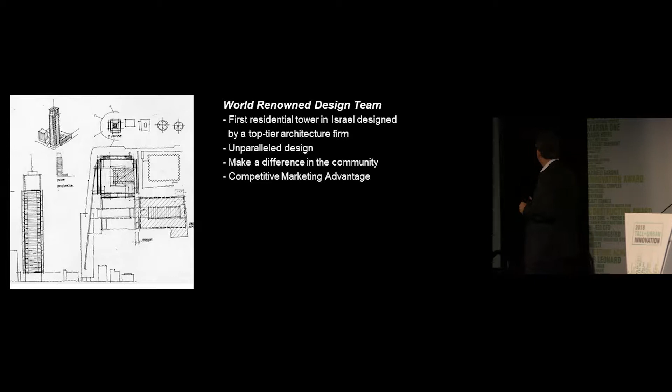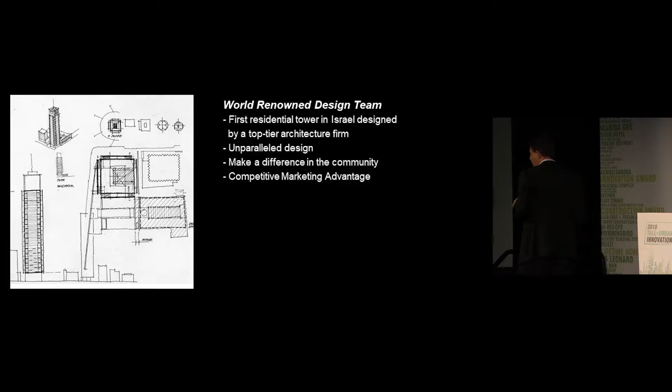As I said, we decided to go with Richard Meier and Partners. We went there, saw their approach to things, and we really liked it. We decided that unparalleled design is the only way for us to make a difference. We need to do something that people will understand is it - that there is nothing better they can choose - because those who are willing to pay $3,000 a foot have all the alternatives. They know what's really good, and we need to cater something which is going to be the best in Israel to date.

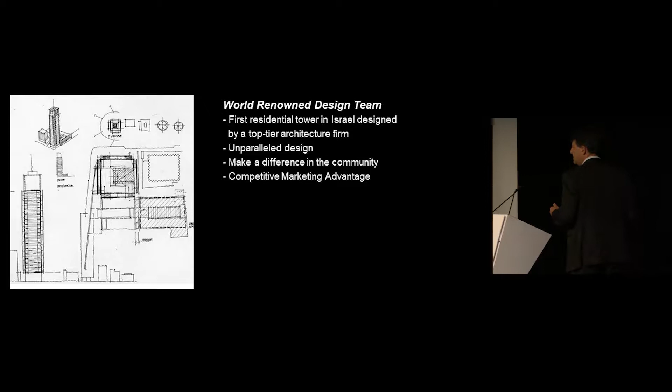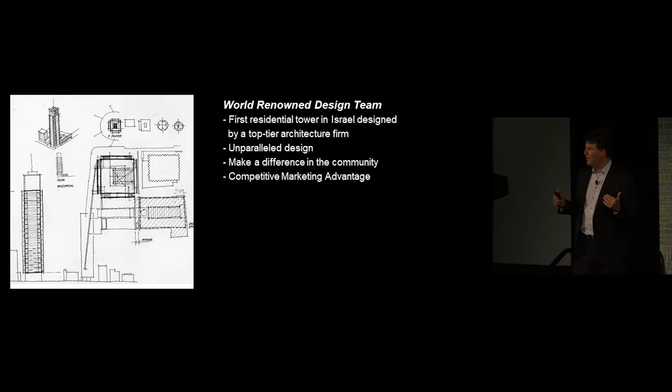Another factor: we were thinking that doing something beautiful on Rothschild Boulevard will give back to the community. Israel is a young country, 70 years old. Tel Aviv is a young city with no real architectural legacy. We thought we needed to raise the bar. We needed to do something better in order for people to appreciate the tower, and hopefully for our tower to become a benchmark.

Something funny - municipality, all the developers, everything goes to the municipality. We were asking to increase the FAR, the amount of meters we could build. On our first meeting at the city engineer's place, when we came with Richard Meier and Partners, it was very funny - the city engineer himself ordered cappuccino for everyone, which may sound like nothing, but for Israel, believe me, it is crazy. Never would the city engineer order cappuccino as a symbol. So when Richard Meier and Partners came over and we got the cappuccino, which seemed something simple - it wasn't.

We got a real tailwind from the people in the municipality. They actually loved us. They were able to fall in love with the tower, to fall in love with the vision, to fall in love with our idea of let's raise the bar, let's do something better, let's do something that was never done before. We were young, we were bold, we were energetic, and luckily the municipality came with us, and we were able to get another 10 floors, which from the developer standpoint is a major difference from a profitability standpoint.

Another thing we're proud of: the buildings around us today - after the fact that our building was finished like 3 years ago, many other towers took ideas from us, or as we like to say, they were inspired by us. Other towers are taking some of the ideas we had and implementing them in their towers. So for us, it's very, very - we're very happy to see that people are taking inspiration from our tower and implementing it in their towers.

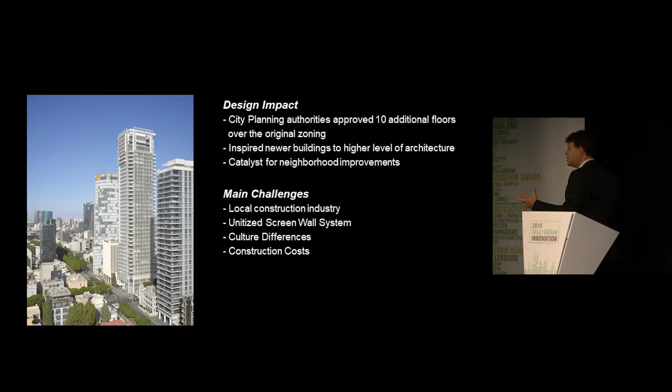From the neighborhood standpoint, we were on the corner of Rothschild Boulevard, which is great, and also Allenby Street, which wasn't that great—it was very much like Canal Street. But after we built the tower and everybody saw that it's something magnificent, even Allenby Street became a better street. The area near the tower became better, the land was more expensive, developers were able to invest more in their development, and around the tower and Allenby, small but beautiful buildings are being built. So in a way, the tower changed how the architecture, business, and development is made.

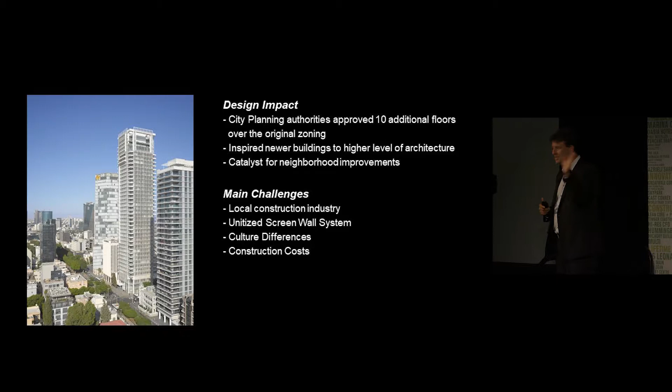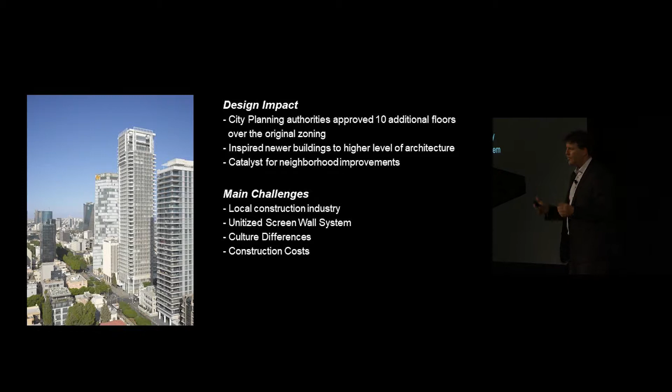As for challenges, it was very funny—we were a young country doing the construction. We had the royal team from New York flying over, speaking English, having these blueprints, etc. And we were sitting with very hardcore people who never speak English, never saw international firms, never saw that—they're just hardcore people who are building. We needed to bridge the gap between the vision, the detail, and the specifications, and people who are ready to work on simple things, on hard concrete, doing stuff which is totally different. So we had to spend a lot of time bridging the gap.

Another culture difference: when we went to the municipality in Israel, we have great weather, great food, but we have war every like 5 years. So unfortunately, we need to have a bomb shelter on every apartment, made of concrete. It was a huge challenge to explain to Richard Meier and Partners how we need to build a bomb shelter on every apartment—that was a crazy culture difference. But luckily, they did it magnificently. They put the core, attached the bomb shelter to the core, and kept the beautiful facade.

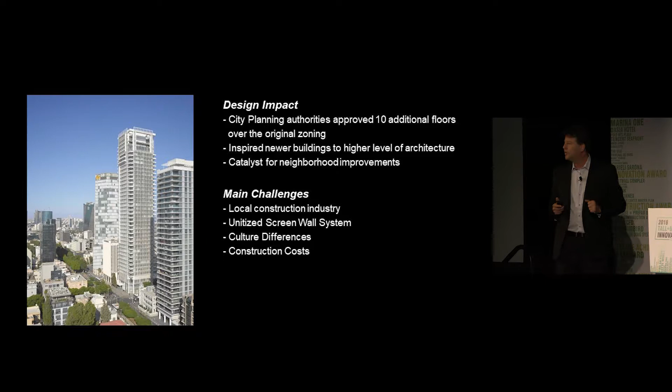The last thing—when we started as a young company doing something very bold and courageous, it was like a recipe for disaster. But working hard with great partners, like our great CM, Vaxon Govrin and Israel David, we had a great team, and with Richard Meier and Partners, we were able to build something that eventually proved extremely profitable for us. Our tenants doubled the value of their apartments, and the whole neighborhood and city gained a beautiful tower that today is becoming a benchmark for future towers.

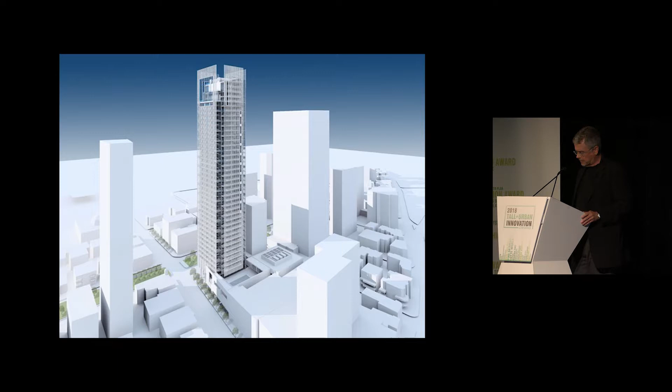The third issue was on the environmental side: to develop a sustainable approach to this arid desert climate, which had tended to generate, around the time we began this project, a crop of fairly anonymous solid or reflective glass buildings. This building is a simple, graceful 42-story residential tower resting lightly on a retail base. It has connectivity to its own retail arcade, restored in a through-block connection from Allenby to Yavne behind the building. That retail assembly has helped embed the building and its residents in the pulse of the neighborhood. The building was also designed with Bauhaus principles in mind.

Our goal for such a large building in a sensitive setting was to tread as lightly as possible. For us, that meant a building of lightness and transparency in order to reduce its scale and mass. That was important for three reasons: in the context of the low-rise neighborhood, to distinguish it from the relatively scaleless reflective towers in the vicinity at the time, and also importantly, to express the optimism, openness, and energy of modern Tel Aviv.

The mechanism for that was a clear glass facade, protected from the desert sun by a delicate louver screen. The screen is an elegant white veil inspired by several things: the vented protective layers of Middle Eastern clothing, traditional Middle Eastern clothing, and local architectural precedents in the ubiquitous trisim, which are these louver blinds.

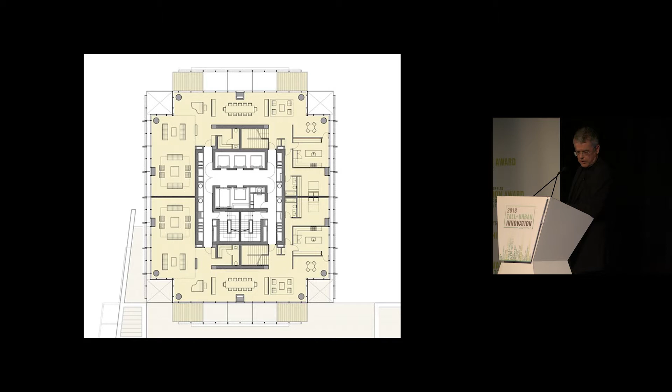This plan's modularity and its small floor plate also create a tremendous amount of flexibility. There's a simple diversity of apartment sizes where one can take a quarter floor, a half a floor, or a full floor. You get the feel of the screen and the balcony. There's a terrific quality of diffuse light in the plan and a simple, very, very simple material palette. No surprises there.

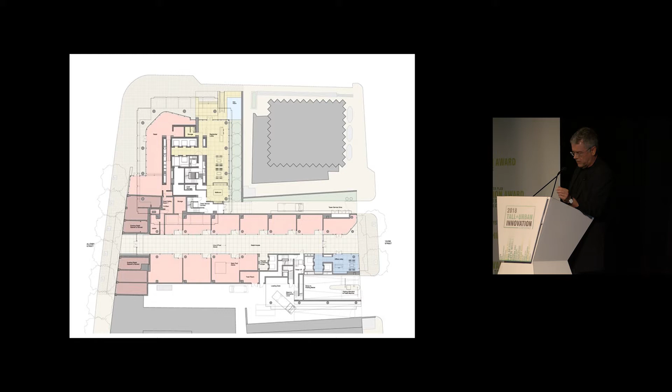The ground floor has lobby and retail spaces that are spare and lofty and open. There is a garden amenity to the lobby that helps soften the compression between this building and the neighboring bank building. And there's a large food court arcade underneath, these amenities which are behind the building, on top of it, a pool, a spa, and lounges.

In terms of contributions, I like to think that we've designed the building to recognize its role in the city. There are gestures at different scales to the base and the shaft and the top. At the street level, the building is lifted on piloti with an undulating glass wall that moves in deference to the importance of this street corner.

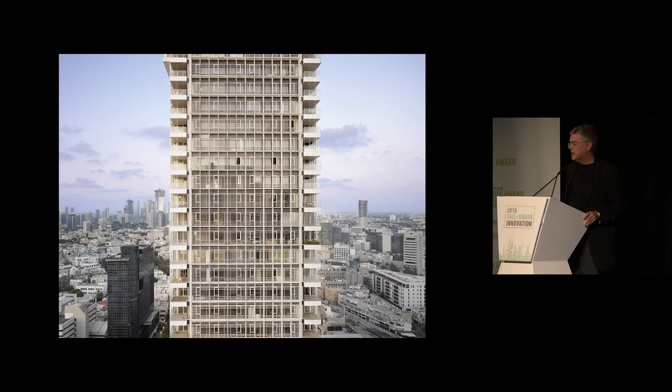It is transparent and lofty, and I would like to think this helps create a vibrant streetscape there. At the scale of the neighborhood, the tower louver screen elements are obviously based in the local architectural precedents, and the changing light and shadow across the day gives the facade a tremendous tactile quality. And at the scale of the city, at the top of the building, we make a signature gesture to Tel Aviv and the importance of views to the sea, which also helps us conveniently camouflage the staggered configurations of the step-back penthouse terraces.

In terms of sustainability, the layered facade is obviously a bioclimatic response to the desert sun. The louvered screen, we use it to protect an already high-performance unitized glass curtain wall.